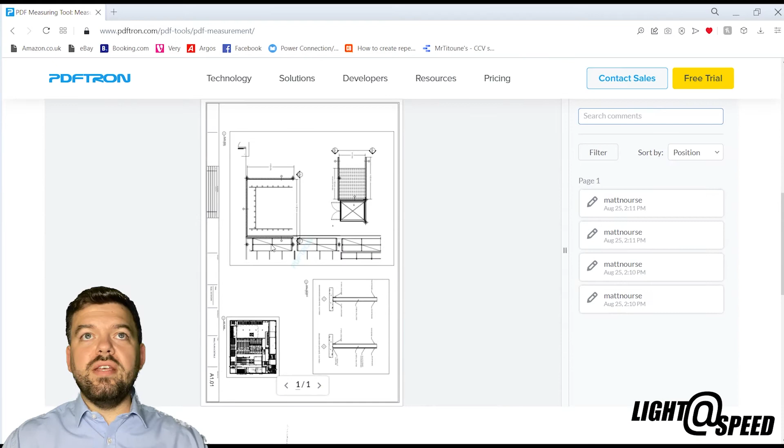So if you scroll down a little bit, you get to select a file. You can then go to show all files, and I have this one preloaded. This is called suspended track. This is the file down here. And we can actually change lots of settings within the file to get it how we want it.

For example, if I click on this little page transition button, I can rotate counterclockwise to get the drawing into the right orientation. And I have a little hand that I can drag around and I can zoom in to the bit I'm interested in. Now, this is the area I'm interested in.

If we just scroll up a section here, we can say measure by distance. I want to find out distances because I want to work out the lengths of these tracks. And you can see at the top it says set scale. Now you might say this is a very odd scale to put in here, and just as easily it could say millimeters to millimeters, and this could be 100 and this could be 1.

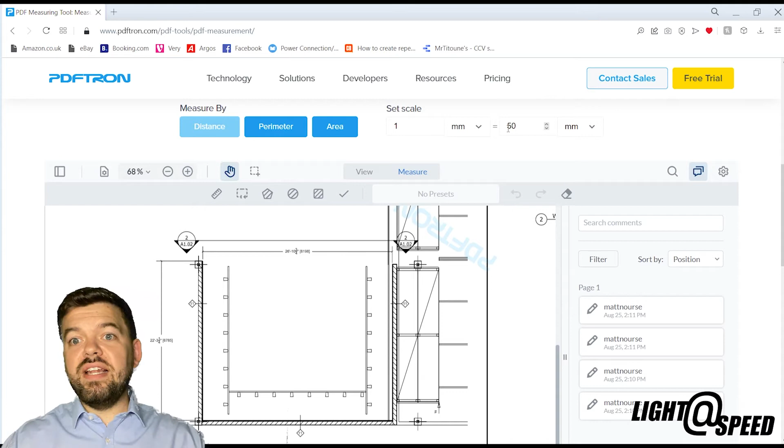1 to 100 being a fairly standard scaling factor for large prints, or 1 to 50 being a fairly standard scaling factor. And if we look at what the scaling is of this particular drawing, we can say it's a scale as shown. So each of these drawings might have a different scale on, but this one, this plan view, if we zoom in right down to the bottom here, it says 1/4 of an inch equals 1 foot.

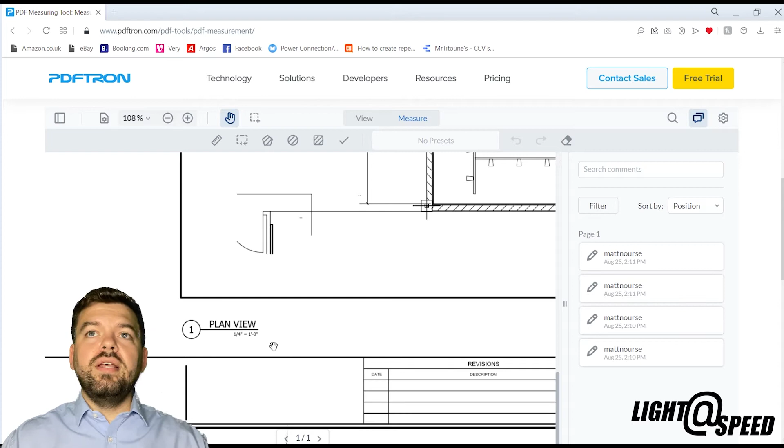Great. Even though the project is in the UK, the designer is in the US, and they've decided to use feet and inches. Good for them. So I need to know what 1/4 of an inch translates to in meters. So if I go up to my scaling here, I can say 0.25 inches equals something in meters.

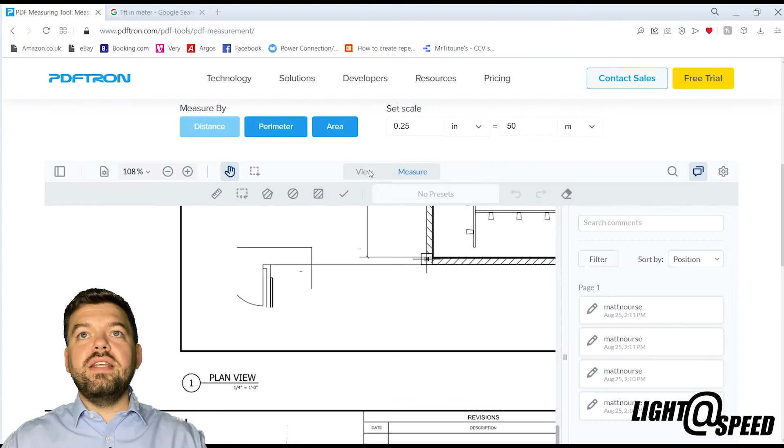Now to work that out, I know that I need 1 foot in meters. So I would say 1 foot in meters in lovely Google, and Google will tell me that it is 0.3048. I take that and I throw it into there, and I know that if I measure 1/4 of an inch on the screen, it will give me a foot in scale. So we can zoom out now. We've set our scaling factor correctly.

The other great thing with this is that I can actually make this full screen. This makes the measurement process a whole lot easier, I think we'll see. I can now take my measurement tool, which is this little distance ruler here.

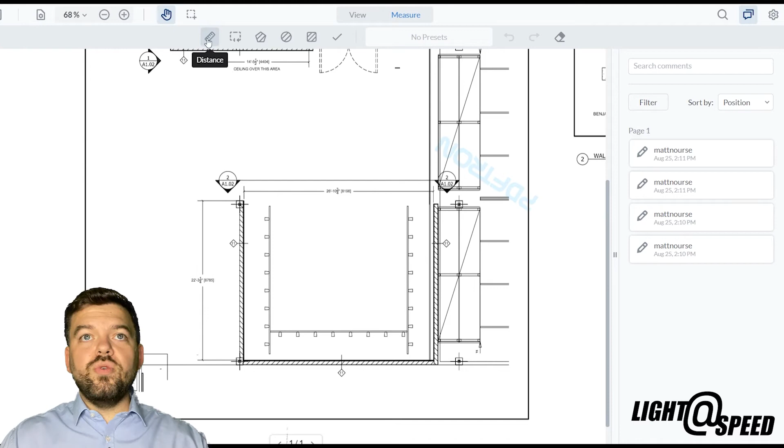After I've zoomed in a little bit, I can click on the ruler, and then I can start clicking on points. So I will click and drag to the end of the track, and you'll see that this is about 6.3 meters. Same again here, but maybe I just want to get the inside track length because there might be a coupler around here.

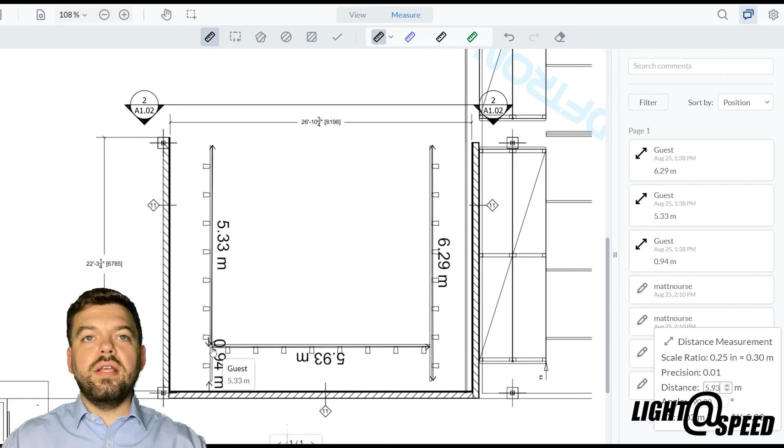5.3, so that means that this little section here will be about 1 meter. 0.94. If I want to get this cross section here too, I can measure that. I'm clicking and dragging. Of course, it's the wrong way round. So if I want to click on one and delete it, I can just click on here.

And I can do it again, but this time we'll drag from left to right so that we can get the legible text. So very quickly, I've measured this in scale in meters. Well, what do I do with this here? I actually have my measurements on the right hand side here, which is useful.

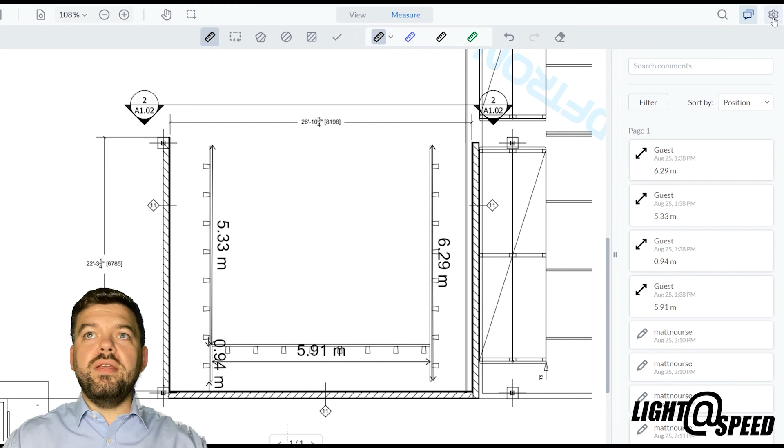But what I like to do is click in the settings menu up the top here and then download it. And I can download this as a PDF that I can then view later on or send on to somebody. So I hope you found that really interesting and quick as a tip.